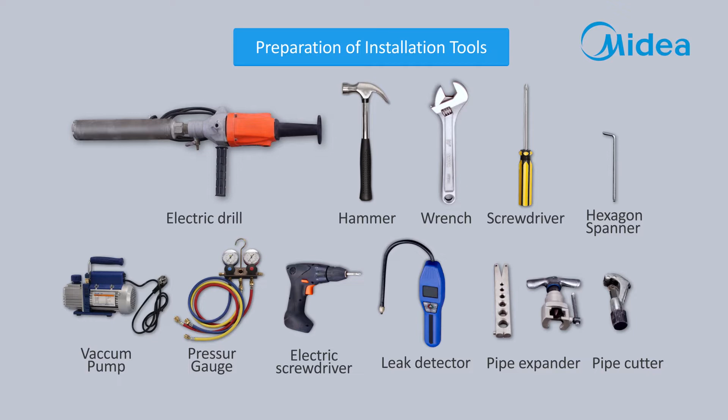Pipe preparation. Cut the suitable length of copper pipe as required. Turn pipe cutter slowly and keep increasing force gradually. Make sure there is no deformation, cut surface should be level. Put the open of pipe downward and remove burr inside with a scraper.

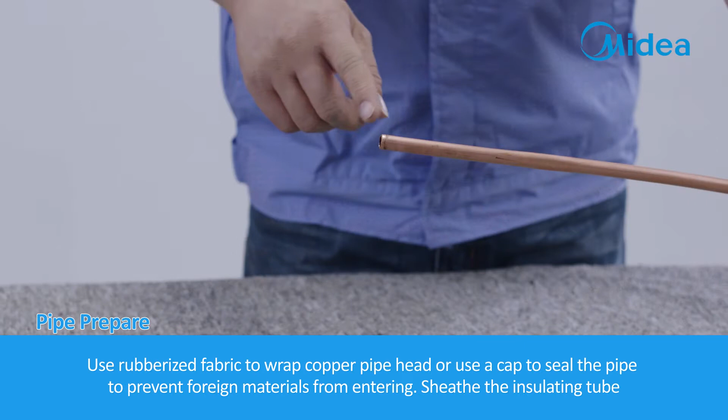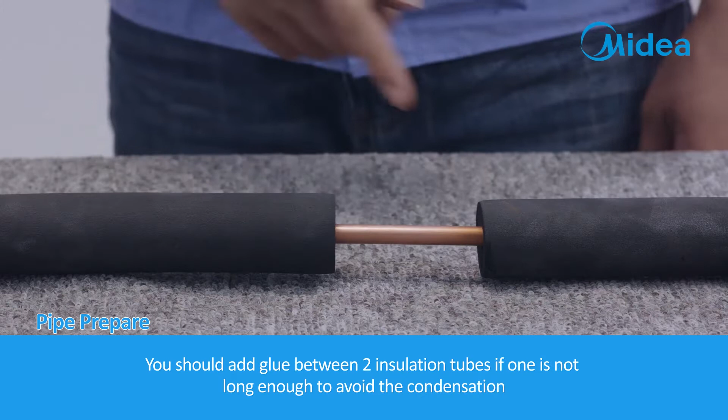Use rubberized fabric to wrap copper pipe head or use a cap to seal the pipe to prevent foreign materials from entering. Sheath the insulating tube. You should add glue between two insulation tubes if one is not long enough to avoid the condensation. Sleeve the nut.

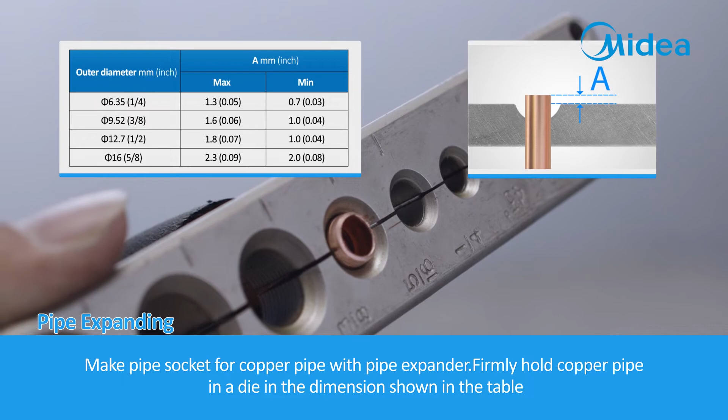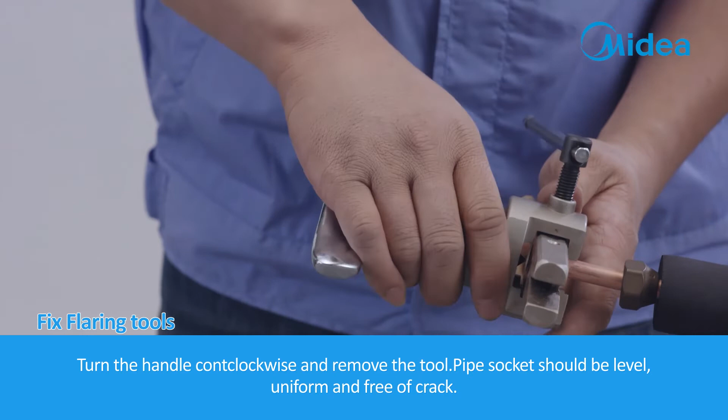Pipe expanding. Make pipe socket for copper pipe with pipe expander. Firmly hold copper pipe in a die in the dimensions shown in the table. Fix flaring tools. Turn the handle clockwise and stop it when it rattles. Turn the handle counterclockwise and remove the tool. Pipe socket should be level, uniform and free of crack.

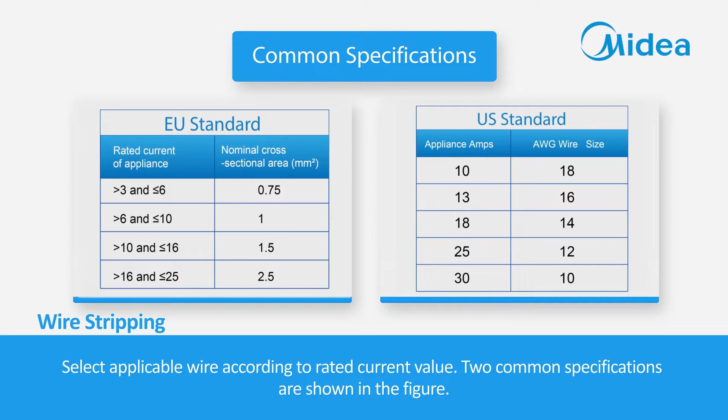Wire stripping. Select applicable wire according to rated current value. Two common specifications are shown in the figure. Strip rubber skin at both ends of connecting wire separately to uncover the connecting wire. Use wire stripper to strip wire core. The length of naked core should be around 10 mm, 0.5 inches.

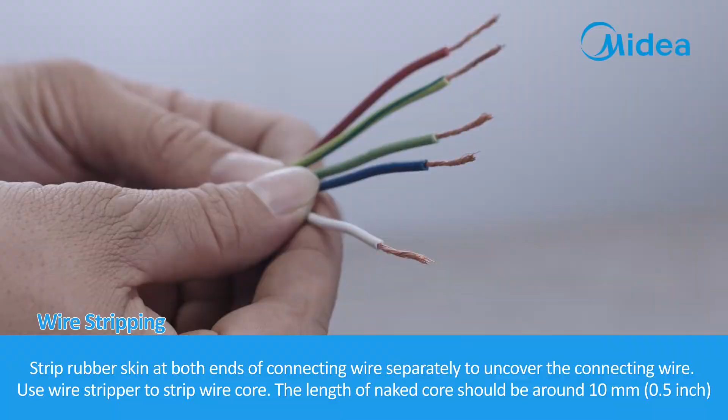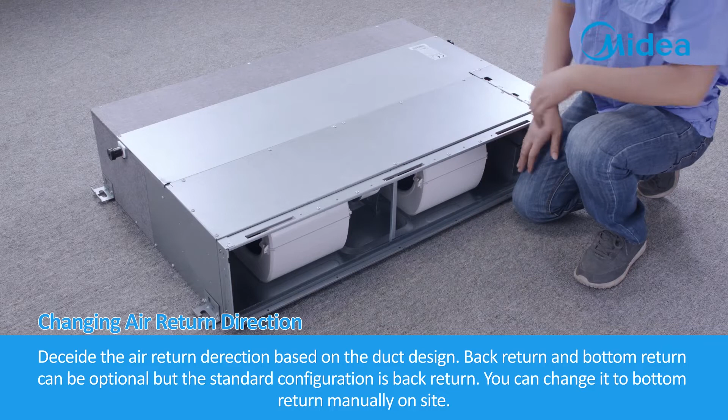Changing air return direction. Decide the air return direction based on the duct design. Back return and bottom return can be optional, but the standard configuration is back return. You can change it to bottom return manually on site. Put the unit upside down. Release the screws to remove the bottom panel.

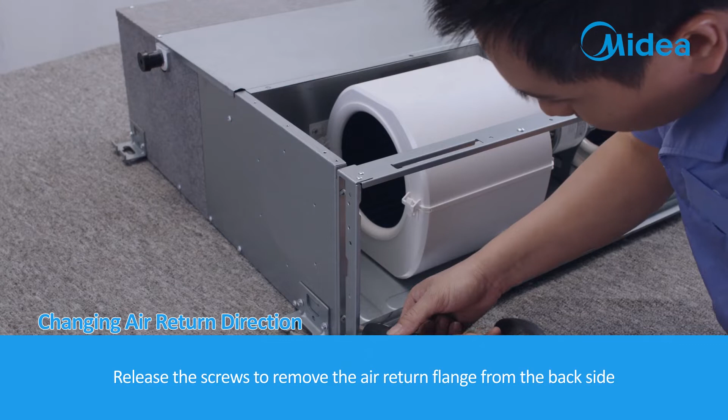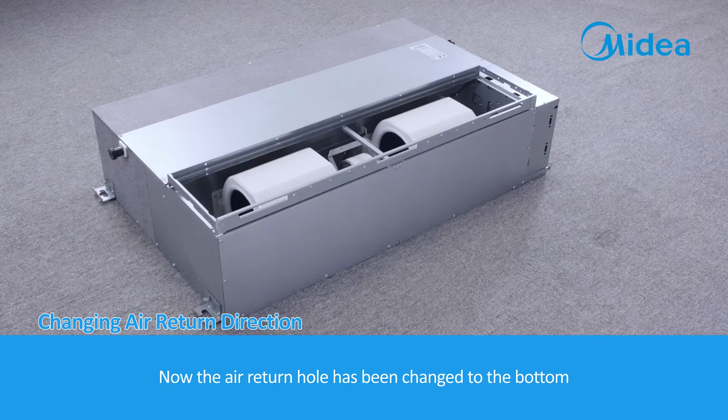Release the screws to remove the air return flange from the back side. Put the bottom panel to the back side and seal it with screws. Put the flange to the bottom side. Note that the fastener of flange should be in the hole of back panel. Then use screws to fix it. Now, the air return hole has been changed to the bottom.

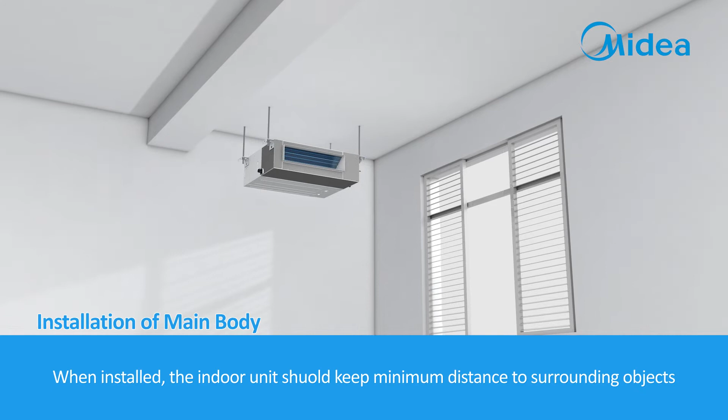Install the main body. When installed, the indoor unit should keep minimum distance to surrounding objects. Make a decision of the position of the installation and the pipe exit direction.

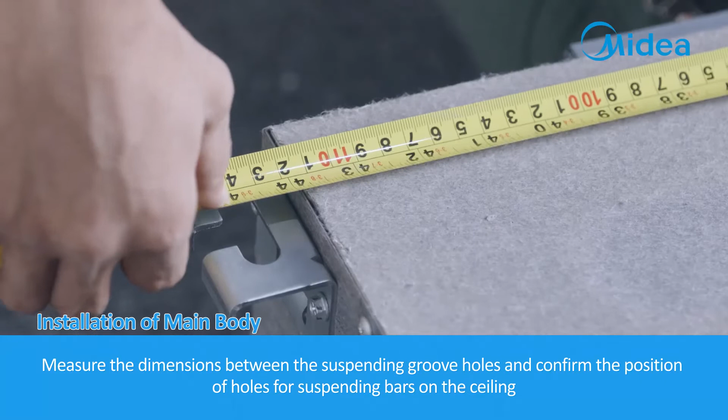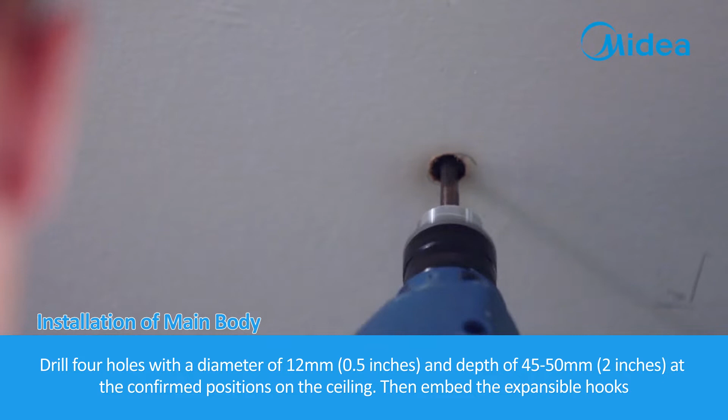Measure the dimensions between the suspending groove holes and confirm the position of the holes for suspending bars on the ceiling. Drill 4 holes with a diameter of 12 mm, 0.5 inches, and depth of 45 to 50 mm, 2 inches, at the confirmed positions on the ceiling. Then embed the expansible hooks.

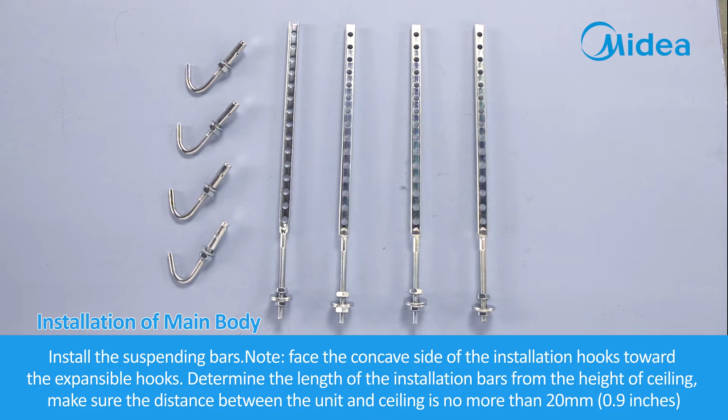Install the suspending bars. Note, face the concave side of the installation hooks towards the expansible hooks. Determine the length of installation bars from the height of ceiling. Make sure the distance between the unit and ceiling is no more than 20 mm, 0.9 inches.

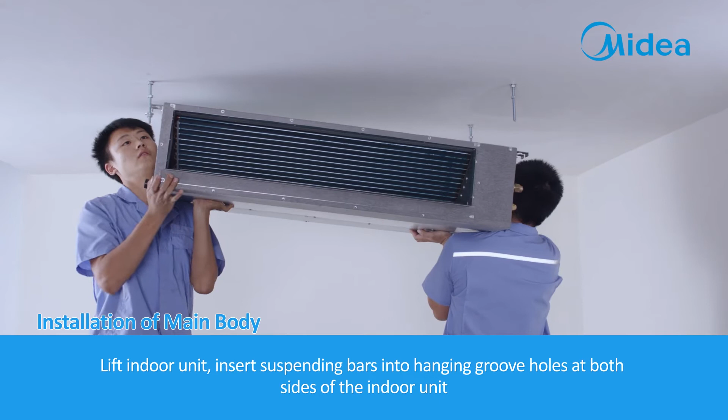Lift indoor unit. Insert suspending bars into hanging groove holes at both sides of the indoor unit. Adjust the nuts of the 4 bars to make sure that the main body remains level with a leveling tool.

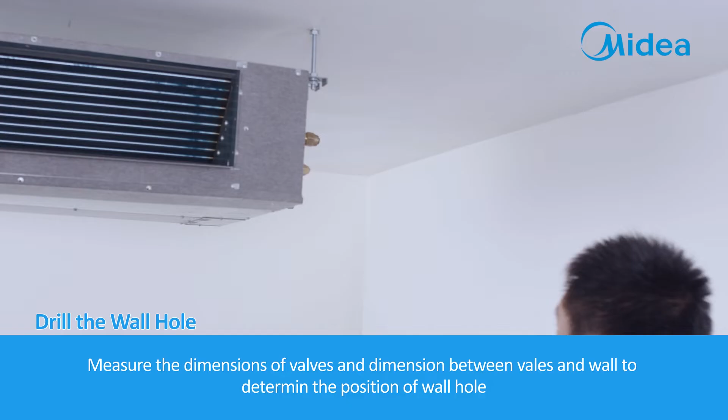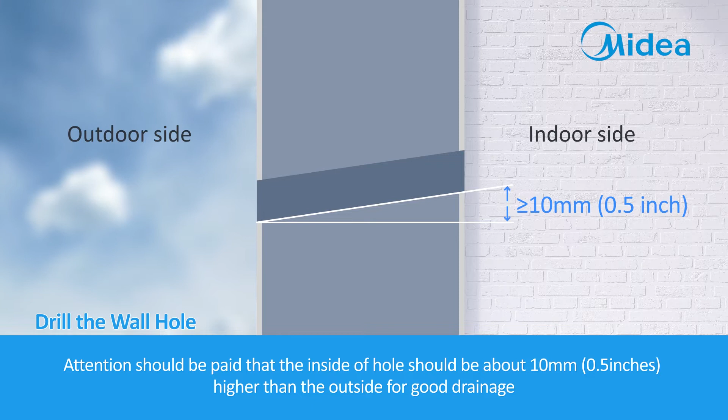Drill the wall hole. Measure the dimensions of valves and dimension between valves and wall to determine the position of wall hole. Avoid wires and other foreign materials inside and on the wall. Attention should be paid that the inside of hole should be about 10 mm, 0.5 inches, higher than the outside for good drainage. The position of wall hole should be a little lower than the lower side of the unit.

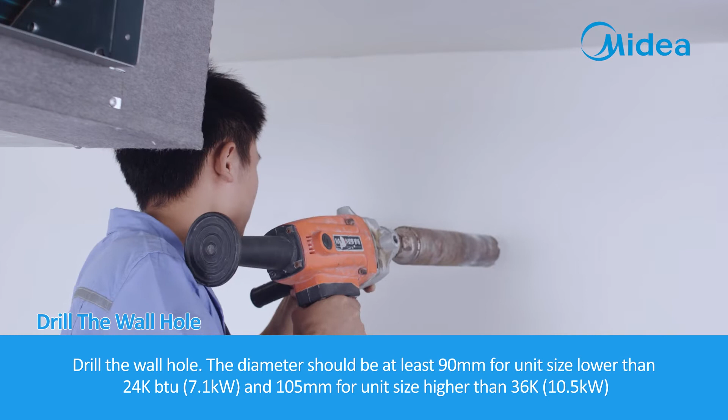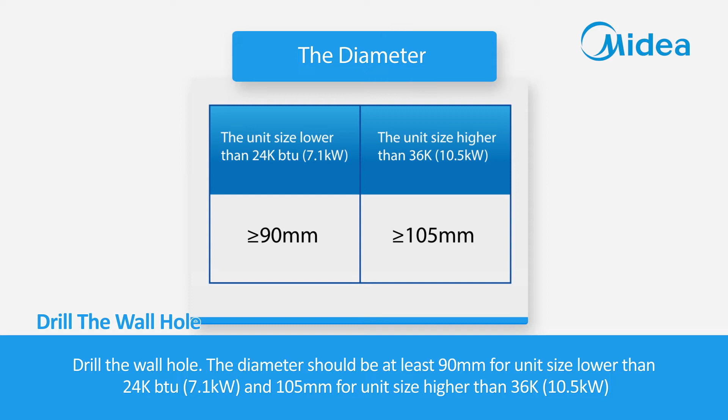Drill the wall hole. The diameter should be at least 90 mm for unit size lower than 24,000 BTU, 7.1 kilowatts, and 105 mm for unit size higher than 36,000, 10.5 kilowatts. Put on the wall socket.

Pipe connection. Bind the connection pipes and wires together with wrapping tape. Wrapping is conducted in order where power wire and signal wire are at the upper side. Connecting pipe is at the lower side based on the approach to exit pipe. And do not pull serpentine pipe hard during wrapping.

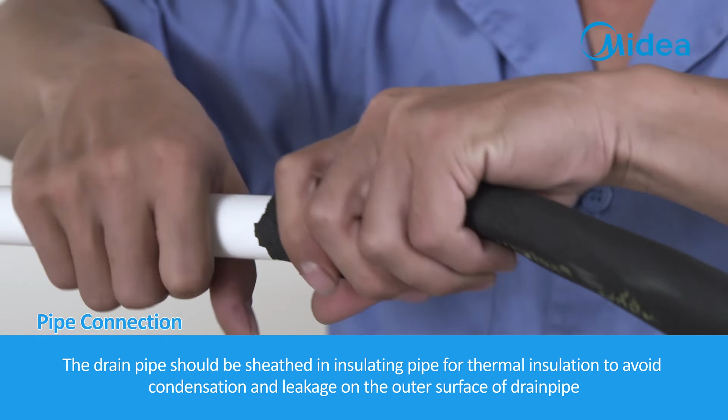The drain pipe should be sheathed in insulating pipe for thermal insulation to avoid condensation and leakage on the outer surface of drain pipe. Lead the connection pipes and wires through the wall hole and into the unit. Note that do not damage the insulation layer.

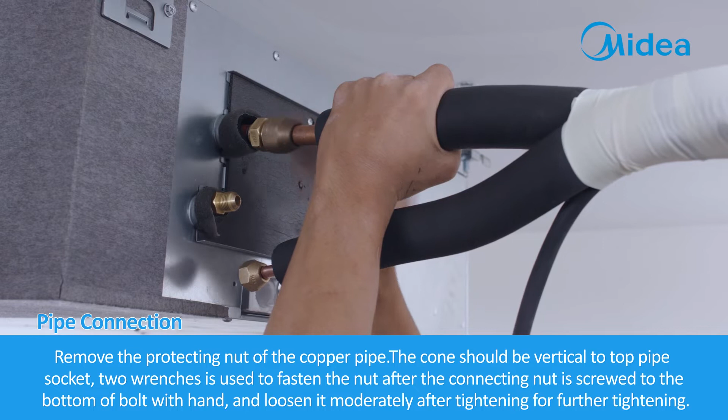Remove the protecting nut of the copper pipe. The cone should be vertical to top pipe socket. 2 wrenches are used to fasten the nut after the connecting nut is screwed to the bottom of bolt with hand, and loosen it moderately after tightening for further tightening. Firstly, connect the high pressure pipe, then the low pressure pipe.

Connection of drain pipe. An extra pipe connector should be prepared if there is no drain hose in the accessories.

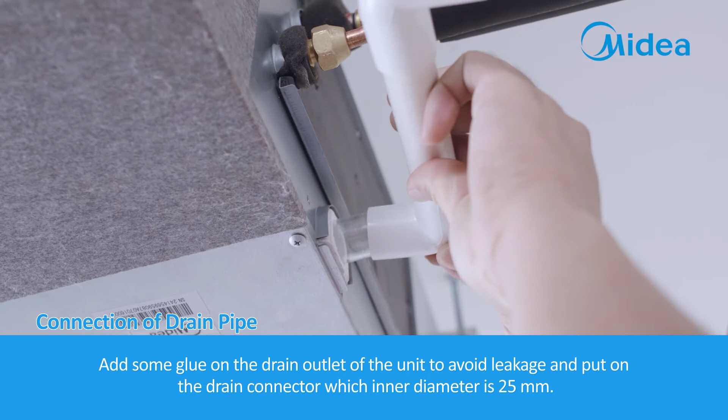Add some glue on the drain outlets of the units to avoid leakage and put on the drain connector, whose inner diameter is 25 mm. Add some glue on the drain pipe and insert it into the drain connector. Make the insulation tube cover the whole drain pipe as well as the drain connector. Do not pull the drain pipe in order to avoid the main body being pulled.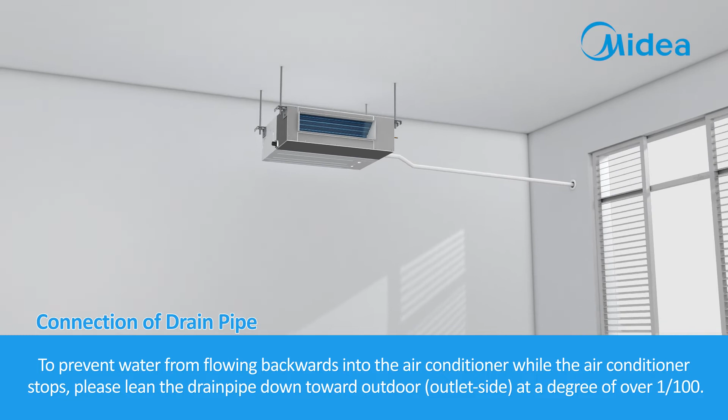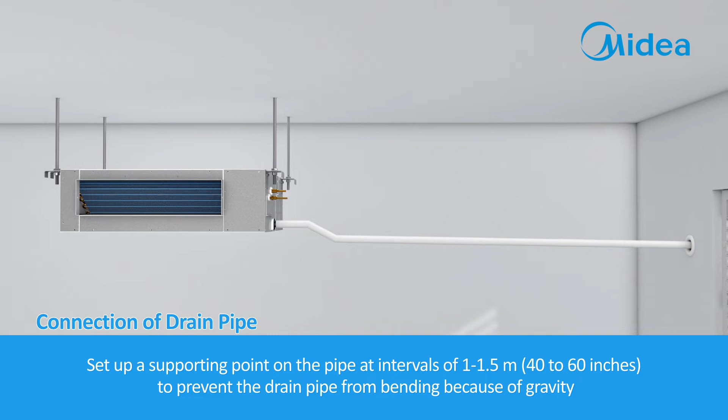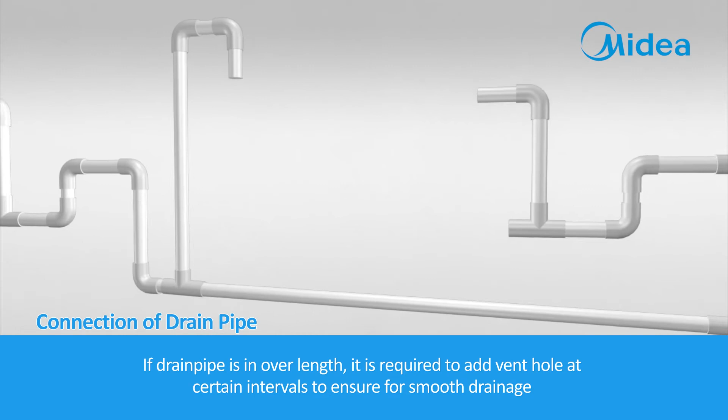To prevent water from flowing backwards into the air conditioner while the air conditioner stops, please lean the drain pipe down toward the outdoor outlet side at a degree of over 1/100th. Set up a supporting point on the pipe at intervals of 1 to 1.5 meters, 40 to 60 inches, to prevent the drain pipe from bending because of gravity. If the drain pipe is over length, it is required to add vent holes at certain intervals to ensure smooth drainage. The end of the drain pipe shall not directly touch the ground.

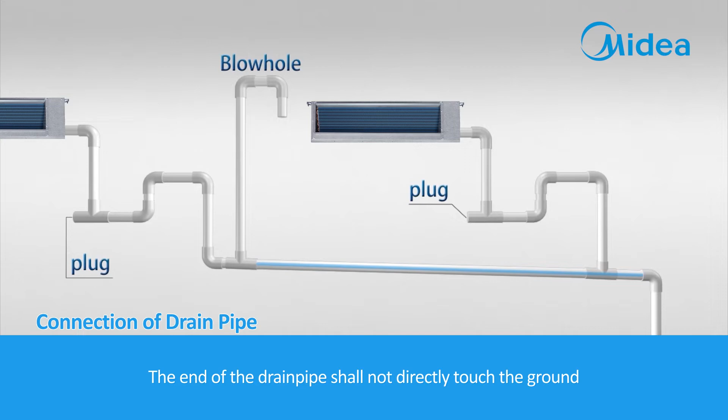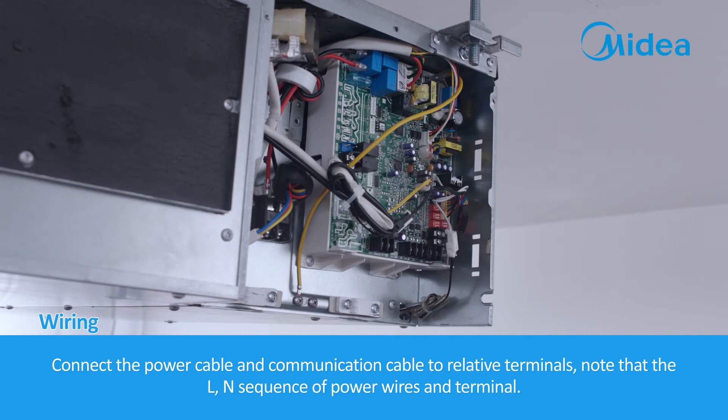Wiring. Make the wiring work strictly as the diagram shows. Release 4 screws for fixing the electrical box cover and remove it. Connect the power cable and communication cable to relative terminals. Note the L-N sequence of power wires and terminal. About the communication, S1 and S2 are without polarity, but the cable must be a shielded one and the shell should be earthed. Release the fixing screws and take down the cable pressing pad.

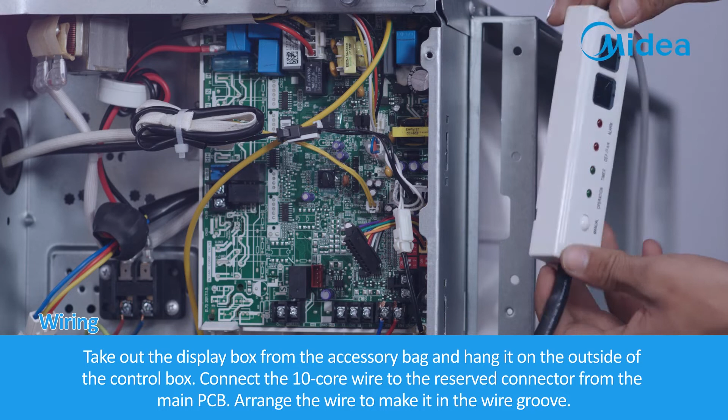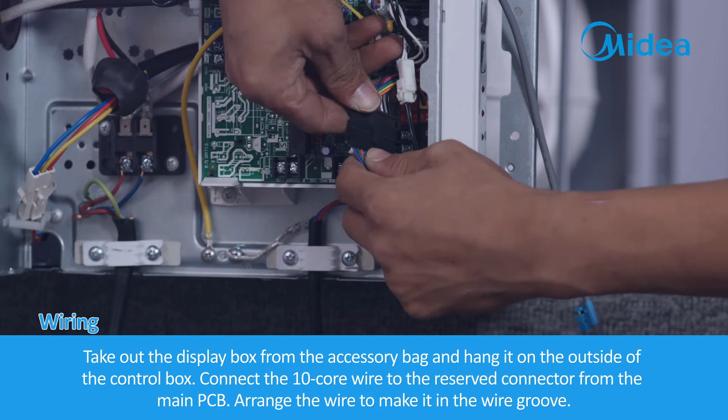Arrange the cables well through the gap of the box, press them with the pad and use screws to fix it. Make sure that the connection will not be pulled. Take out the display box from the accessory bag and hang it on the outside of the control box. Connect the 10-core wire to the reserved connector from the main PCB. Arrange the wire to make it in the wire groove. Connect the wire of the wired controller to the connector from the display box. Close the electrical box cover and fix with screws.

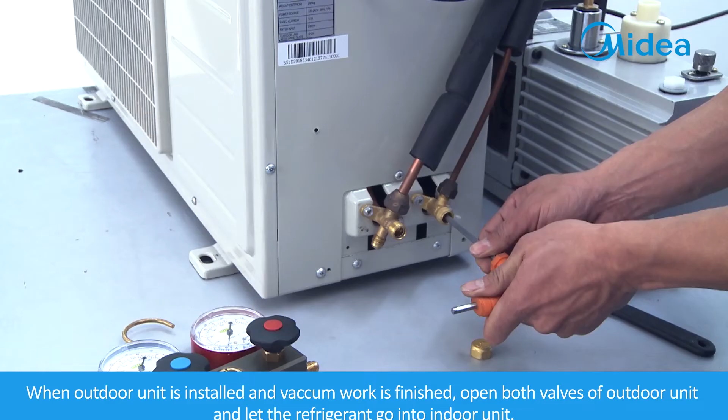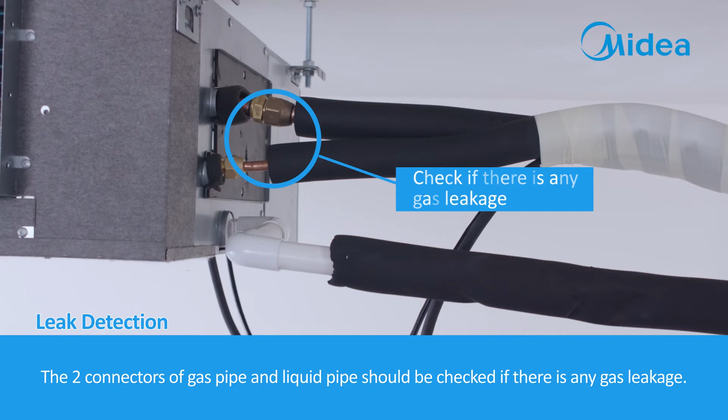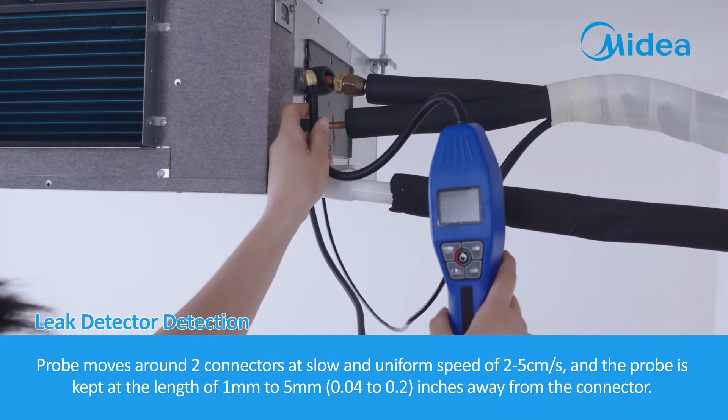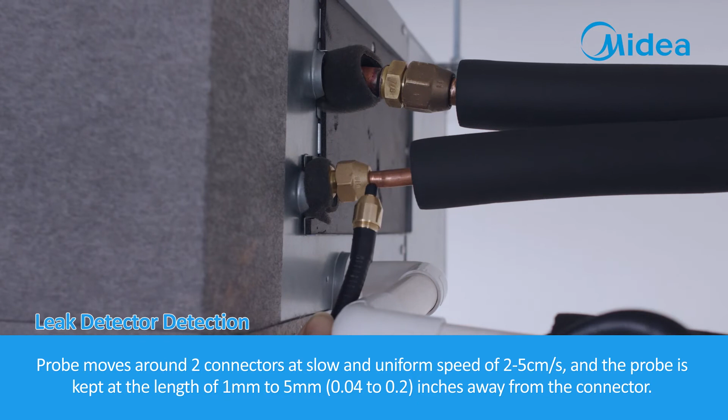Leak detection. When the outdoor unit is installed and vacuum work is finished, open both valves of the outdoor unit and let the refrigerant go into the indoor unit. The 2 connectors of gas pipe and liquid pipe should be checked for any gas leakage. The probe moves around the 2 connectors at a slow and uniform speed of 2 to 5 centimeters a second, and the probe is kept at 1 mm to 5 mm, 0.04 to 0.2 inches, away from the connectors. It turns 1 lap around the valve ports of the high pressure valve and low pressure valve respectively. If a leak alarm occurs, remove the probe for retesting and confirmation.

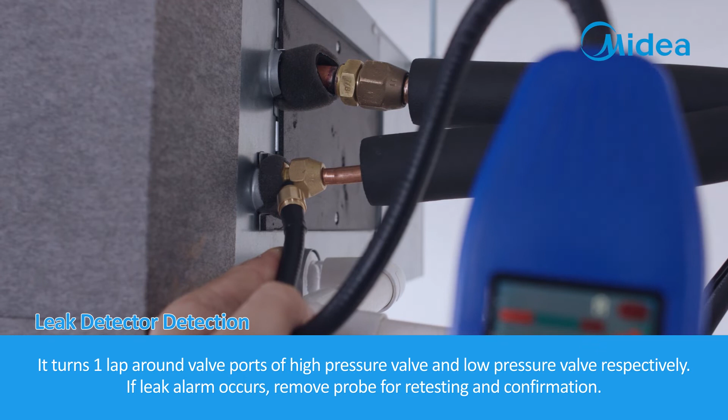Soapy water detection. Apply soapy water of high concentration (washing powder is inapplicable) to all interfaces of nuts with a brush. Then observe it for 2 to 3 minutes. Repeat this as needed. If bubbles emerge, leakages exist in the system, and the nut should be tightened further. Cover the connectors with insulation tube and band them with banding tape.

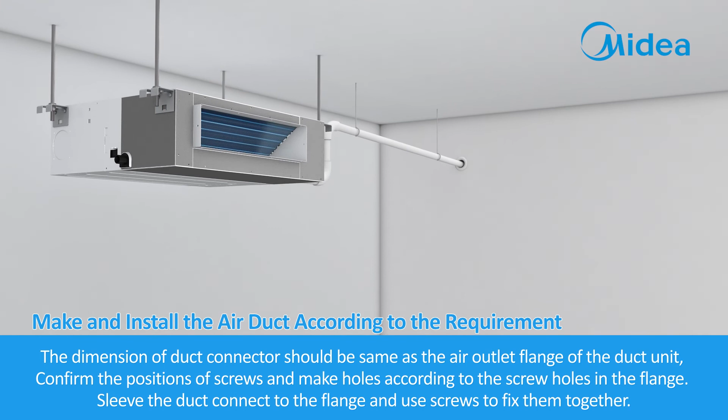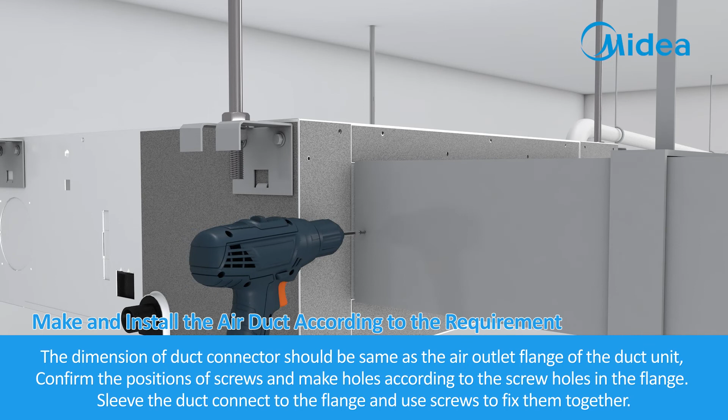Make and install the air duct according to the requirement. The dimension of the duct connector should be the same as the air outlet flange of the duct unit. Confirm the positions of screws and make holes according to the screw holes in the flange. Sleeve the duct connector to the flange and use screws to fix them together.

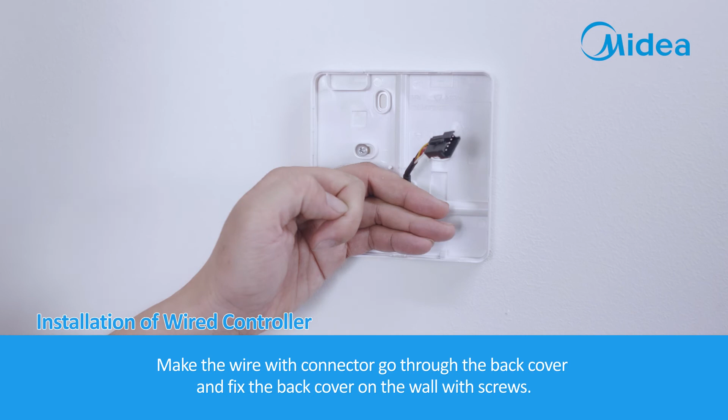Installation of wired controller. Use a flat screwdriver to push the buckles of the wired controller to open it and remove the back cover. Determine the installation position and use the back cover to locate the screw holes. Drill screw holes, and a wire hole if you want to make the wire concealed. Make the wire with connector go through the back cover and fix the back cover on the wall with screws. Connect the wired controller. Install the main part of the controller on the back cover. Put the upper side buckles into the holes of the back cover, then push the lower side to the cover until a click sound.

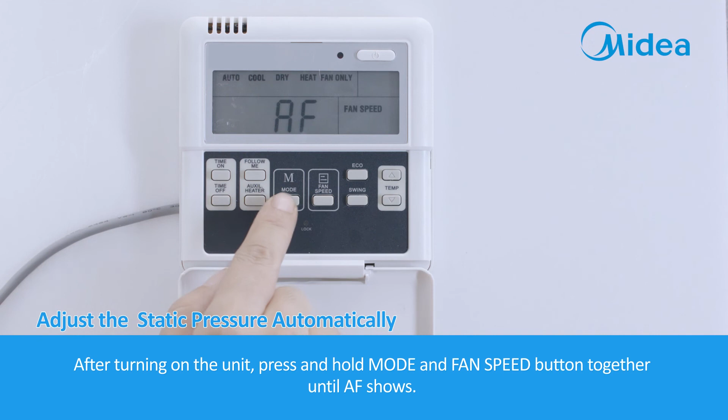Adjust the air volume regarding static pressure automatically, for units with DC motor only. After turning on the unit, press and hold the mode and fan speed buttons together until AF shows. Then press mode again. AF will flash at 1 Hz. Now the unit will start to detect the static pressure and choose a suitable fan speed setting to maintain constant air volume. After 3 to 5 minutes, AF disappears and the unit turns off by itself. Now the operation is done.

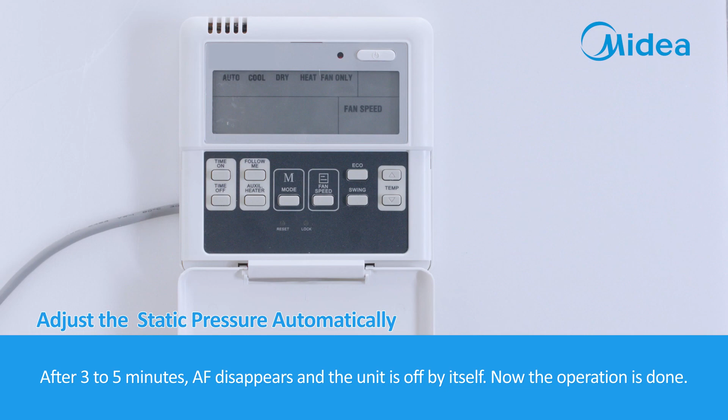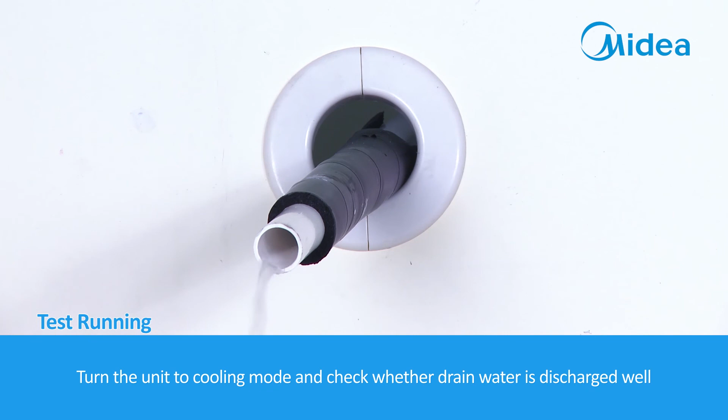Test running. Use the wired controller to check if all the functions are normal. Turn the unit to cooling mode and check whether drain water is discharged well. Treat the drain pipe well. Seal the wall hole to avoid outside air and other objects getting into the room.